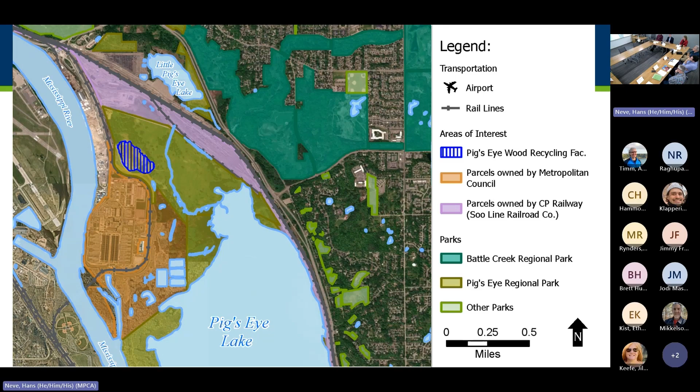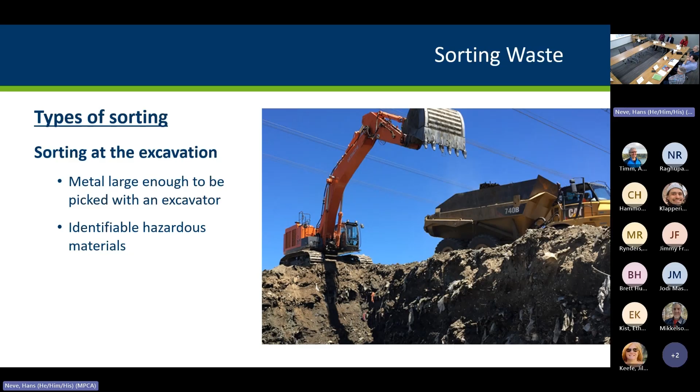This is also waste sorting, this other end of the spectrum. We've got two what we call material recovery facilities. On the right, this is single stream recycling, relatively clean in-feed, higher recovery rate. Research we're getting is like 89% recovery rate.

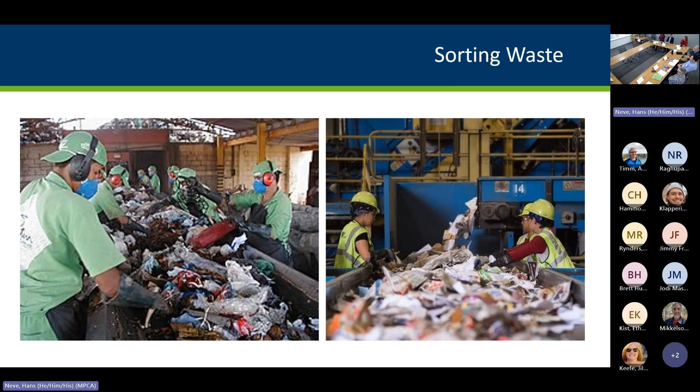On the other side is what's called a dirty materials recovery facility. The whole MSW waste stream is going, and they have certain targets. People are picking out certain targets for the sorting. It's a different kind of sorting, and there are things in the middle.

So we did research into this, where waste sorting is done of landfill material. We weren't finding cases where they were doing it for economic reasons. It really was cases where they have other reasons, other motivations. One of them was reducing the size. That was one. Yeah.

We were hoping to present a whole lot of information today about cost and dollars and tons and case studies. Where we're landing actually is this. Next slide. So we've got really more questions than answers right now with the waste sorting. It gets complicated. These are I think the four big questions, and we may actually need more research and maybe even some pilot studies to figure this out.

What would the percent recovery look like on this? It seems like the dirtier the in-feed, the lower the recovery rate, and it seems to drop off quite dramatically with how contaminated the in-feed is. Could this waste be sorted? Yes. We have the technology, might be a multi-step process, including cost. We could separate out the component pieces.

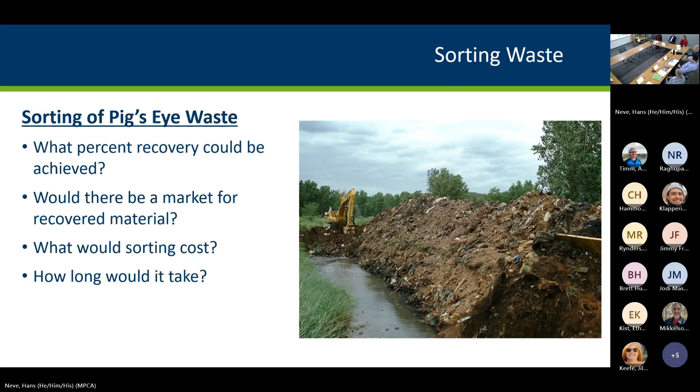Right. Let's keep going. Next on the agenda is a team from Clean Harbors to talk about moving waste.

Some of you have the literature we brought. There's some more, so

Thank you all for giving us a chance to talk to you today. This is quite a large task you've all been given. This is nothing really new for us, so I thought we should come and talk to you about our experience with it and give you our feedback on your project.

Yeah, you bet. Diane Ruddle with Clean Harbors. I've been here for, I think, about 17 years in different roles with Clean Harbors, from operations to now I'm the PFAS leader for the Midwest, West, and Western Canada. I'm here with Joey Maloney, who's our project services representative for the region as well. Project services for Clean Harbors just means big and complicated. So that's why he's here.

So I'll give you a little overview. Some of you may be familiar with Clean Harbors, some of you aren't. Clean Harbors is a fairly large company. We have 100 waste management facilities throughout the country, including incineration units, hazardous waste and non-hazardous waste landfill sites, wastewater treatment. We're also recognized as one of the global most sustainable corporations. So I think that's something to celebrate when you're talking about a hazardous waste company.

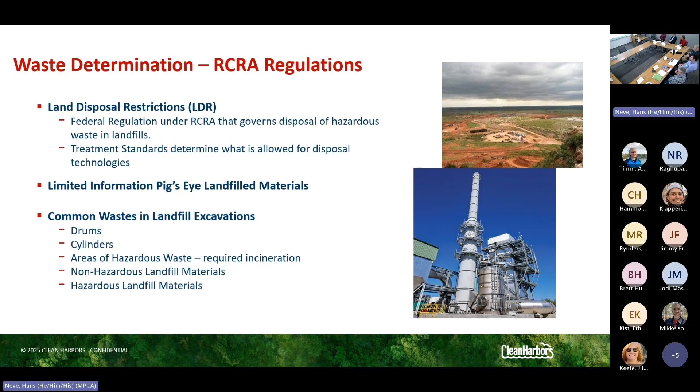You're going to find a lot of buried treasures. You know, you've got drums. You're gonna find some interesting cylinders that nobody knows what they are. You have to figure that out before you decide where they're gonna go. Areas of hazardous waste, I don't think it's too out of the realm to think that you're gonna find some spaces that really should go somewhere permanently and not stay where they are. Non-hazardous materials, there's probably gonna be some areas like that. And then hazardous landfill materials. So the spectrum.

Just talk to you a little bit about our landfill network. We have some of our hazardous waste landfills listed there. Most of them have really good rail service. That's going to be key for this project. Every landfill and every facility in general has different permit requirements as far as what they can take, how fast they can take it. And that's going to be a key part to this project as well, where it's going to go, how fast they can move it.

We do have a large disposal network for all different types of concentrations of waste. So that's going to be also key. And we've got, like I said, a lot of years of experience managing large projects. I think we're on our 45th year of operation today. So kind of impressive for hazardous waste companies.

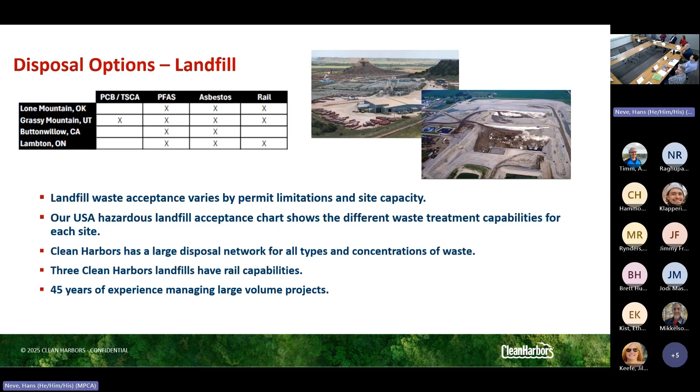Thermal treatment options. We have 66% of the capacity in the country for commercial hazardous waste incineration. They're spread out throughout the country. They're not on every corner. So they're not around the corner everywhere you go. It's a different niche market. Just thought it would be interesting to see the spectrum there.

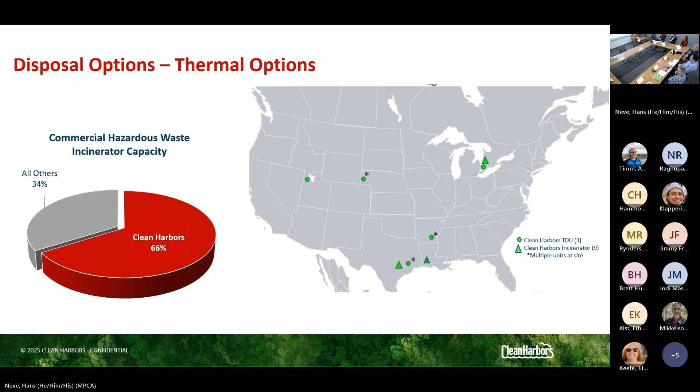We know that there was some talk about barge transportation. Being that it's on the river, that's natural, thinking that that would be a good way to go. We took a look at it. We had some internal discussions, and for this project, we really don't feel like it's going to be your best fit. And there's a couple reasons for that.

When you have to fill up that barge area, it's a big space, and you have to do it fast. So you'd have to have all that material ready to go right when that ship's ready, and then you have to get it there, get it loaded real fast because they charge you a lot if you take any sort of time for it. So you're paying for the slip fee, you're paying for the demurrage for the crew, fuel. They hit you pretty hard.

Now, when you're talking about waste too, that compounds it because you don't want to put the waste directly in that barge. It's not like shipping corn or something like that. You have then contamination that you need to deal with, decontamination, cleaning at the end. Those fees really expound fast. So for quite a few of those reasons, we would say that that's really not going to be your best bet.

In the past, when we've barged waste like this, there's a facility that can barge right out of it, and it's going right to a facility that can barge as well. So when you have two transportation legs to deal with at the beginning and the end, once you get it down the river, you eat up a lot of your savings.

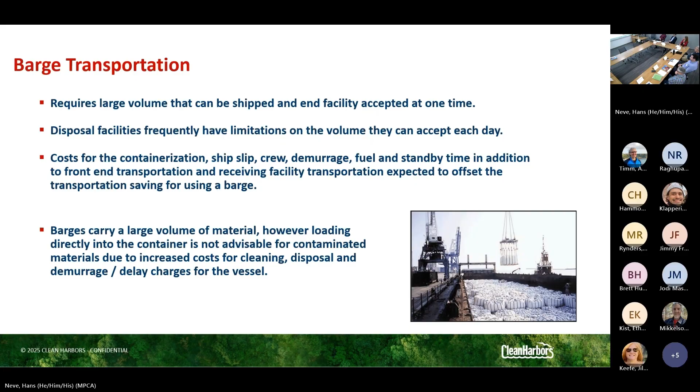And you can see the bags there. That's pretty much the most efficient way to transport waste in a barge because you can control the amount of spillover and contamination of the barge itself. If you're putting clean corn in it, you don't want to say there was hazardous waste in it right before. So that's a little bit about barging.

Railroad is really where we think you're going to find your sweet spot in this scenario. We own a lot of our assets, so the savings of $95 to $125 a ton, that's just a general average for projects. Every location is different. Every distance it has to travel is different. The longer it has to travel, the greater your savings is when you go for rail versus rubber.

Railroads, like you touched on, are not service-oriented companies. You have to really know what you're talking about when you're working with them. You have to basically do all the pieces and then just call them when it's ready. And then they route it through their network to get to the end facility. And you give up a lot of your power when you ship via rail because you can't say definitively it's going to be there on Tuesday, because it goes on their schedule and through their network and then it gets there when it gets there.

So when you have a facility that's expecting your load on Tuesday, they have to be flexible enough that they might get it on Thursday or Friday. And then they have to have the personnel there to deal with that. So it's kind of a coordination piece of it. We are very used to it. We're the largest shipper of hazardous waste by rail in North America. We do over 10,000 rail shipments a year through our network, facility to facility and then straight in as well, depending on which sites we're looking at. And like I said, we do have a very large fleet of our own, which helps us control some of those cost savings.

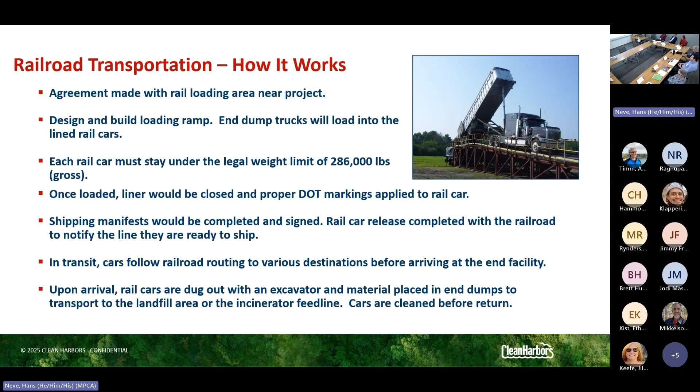In terms of case studies, that tends to be a nice way to kind of frame past projects and current projects. There are a couple abstracts in those binders of the recent projects that we've done. WDE was one that was done in Minnesota fairly recently. So it was an industrial pit that was a closed landfill. We built that structure around the excavation area to control smell and deposition into the atmosphere. And there's a picture, I think, inside the building of the excavation as well.

So we did the install and deconstruction of the temporary building, removal of 397 intact and partially intact drums, overpacking and analyzing, as we talked about. When you pull out those drums, you have to deal with them one by one. And then 3,000 debris drums to our Lone Mountain facility in Oklahoma. We excavated and sampled 13,000 tons of RCRA contaminated soils. So that's hazardous waste soils.

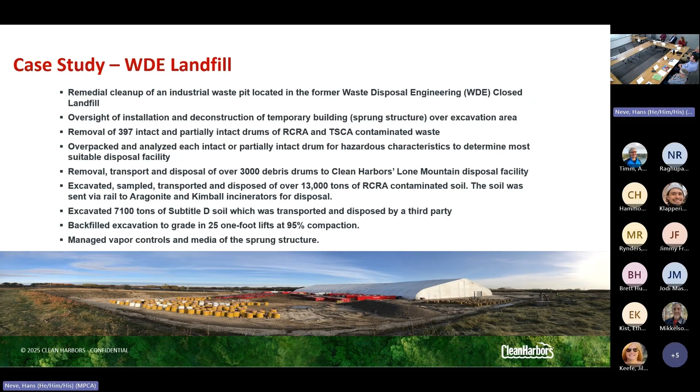And that went to facilities, and those are incinerators in Aragonite, Utah, and Kimball, Nebraska. And then there was also 7,100 tons that were able to go to a Subtitle D landfill. So Subtitle D, that's a non-haz landfill, if you're not speaking RCRA. We did backfill that excavation, and so managed vapor controls and media throughout the structure. So beyond that, when you're shipping loads, you can use a foam product that helps control some of the vapor and odor issues. So that's also another option for odor control, because obviously that's a concern.

So it's just a general slide about Clean Harbors. This is one of our remediation sites in Hawaii. They just gave us a nice little rainbow for that photo, so we wanted to use it here. 12 billion gallons of PFAS water treated. That's just a stat for us. 200,000 tons of PFAS soil removed so far. 95 treatment systems installed and operating, and 85 large remediation projects on the books. So, everybody's definition of large is different. Ours is fairly large.

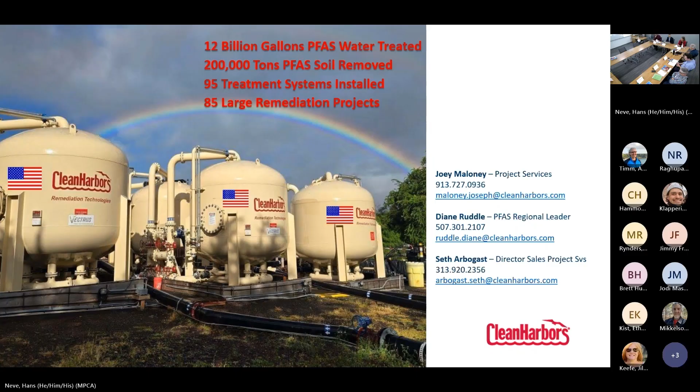So Narayan here with WSP. We've been supporting Hans and MPCA on this project for the last 3 years. So I just wanted to go through some of the cleanup options. I think we've talked through some of these options previously. So we looked at the targeted waste relocation and the filter option, which was pretty much removing part of the waste which separates Battle Creek and Pig's Eye Lake.

So it's just a partial removal, a targeted waste removal, and then putting in some kind of a filtering material to prevent groundwater moving into these water bodies. So you're not truly cleaning up the waste. It's just a filtering mechanism to reduce waste going into these water bodies.

So for this limited treatment, we said it's going to cost $30 million, with the timeline being less than 5 years, because you're just working on a limited area, and with an O&M cost of $6 million. So pretty much it is just keeping up with the landfill, because you truly don't have any kind of long-term treatment here.

The second option was the dig and haul with no backfill. So pretty much, as we've talked about, this is just creating a bigger Pig's Eye Lake where you dig out everything, and all the waste goes off-site.

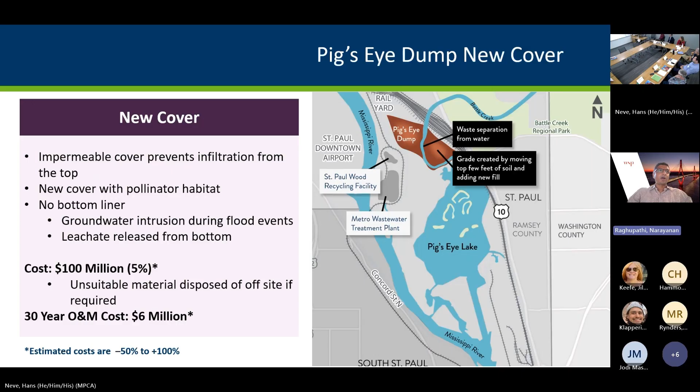And this is pretty consistent on both sides of the landfill. Even on the eastern side of the landfill, where it goes into Pig's Eye Lake, you can see it's pretty much flat. So what the plan would be is we would regrade the site at a 5% grade, so you get this slope. You may have to bring in some clean material if needed, and you would build a 3.5 foot cap. This would drain your water away from the landfill into Battle Creek and into Pig's Eye Lake, so this would truly help with some of the infiltration that is currently happening.

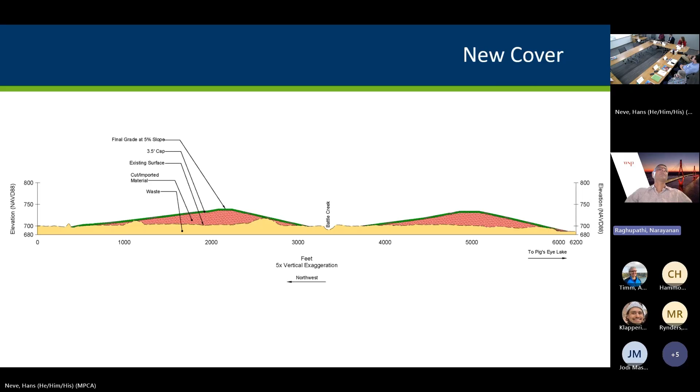I don't know if you can go back to the previous slide, please. Yeah, you can see where you're raising the elevation. If you're almost at 700, you're raising the elevation to almost 740 to get that grade. So it just helps, because right now you pretty much have flat areas across the landfill.

Narayan, can you put into some context the environmental benefit of what's currently potentially coming out of the landfill into the environment or the Mississippi right now by avoiding that permeability into the top layer, given the groundwater coming from underneath?

I think as we complete, because right now I don't know what the concentrations in the soil are. I think that's been one of those mystery questions: what's truly in the waste? What are the concentrations within the waste? How much of it has already leached into the groundwater over time? So if it is concentration which is already in the groundwater, if that is just moving up and down, versus what's the concentration within the waste, and then what is that infiltration rate,

so that is part of the modeling we are looking to complete by the end of the year, to answer some of those questions: the volume of contamination or the mass of contamination within the landfill within the groundwater. So what does that mass balance look like? So I don't have all of those answers as to how much of it is from the groundwater moving up and down versus the true infiltration from superficial infiltration.

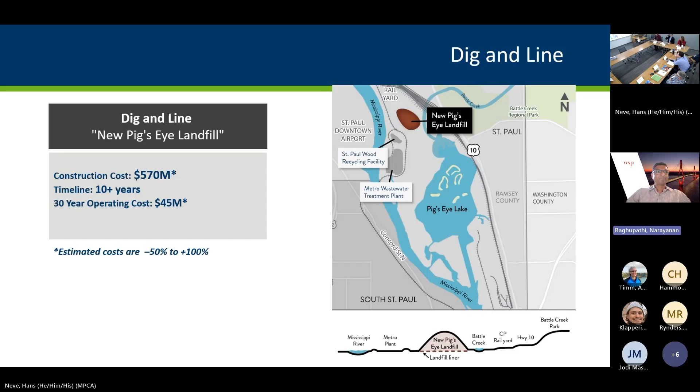So again, just to add more context to the dig and line option. We looked at this where we said you have the Mississippi River to the left, you have the metro plant, and then you build a new landfill, which would meet all the permit requirements. You would design it to have a liner, leachate control, landfill gas control. And then the cost being $570 million over a 10-year period. And this gives you a visual representation of what it looks like with respect to Battle Creek Park. Next slide, please.

So when we developed this $570 million cost, we made some broad assumptions. We are dealing with a landfill volume of 4.5 million cubic yards of waste. Some of that waste is inside the water table. So once we excavate it, how much more clean material do we need to get it above the water table, so that you're still not building a landfill inside the water table? Completing the current design investigation, what does the topography look like? What is the environmental investigation that needs to be completed with respect to characterizing the waste?

How much waste? Because we still need to determine, because the waste depth changes within the landfill. So we just completed some of that investigation over the last month. In some cases, you have waste at 6 feet, some cases all the way down to 25 feet. So we are seeing a big variation in the depth of the waste. So we want to complete that part of the investigation with understanding the waste, the mass in the waste, and how we want to characterize that.

And then the last piece is the geotech investigation. The geotech investigation is important because you want to determine your slope stability, how much settlement you are going to have, because once you consolidate all that waste within the landfill, what is the weight of that landfill going to be? Are you going to create any settlement issues? What is the slope going to look like? So we need to complete the geotech investigation.

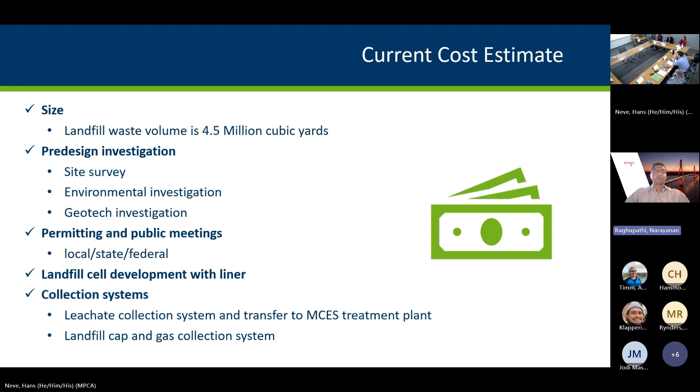And then from a landfill construction perspective, what does that cell development look like? Building a landfill with a liner. What are the collection systems from a leachate collection system? Right now we have not included costs for treating the leachate. The anticipation is we can transfer it to the MCES treatment plant, and then the landfill cap and gas collection system. Because the leachate treatment is also going to be a big part once we understand what that looks like. We would have to model some of that to understand what that leachate concentration might be, because we know the groundwater concentrations, but not from a future leachate collection system. Next slide, please.

So what are the benefits? So two things we're going to look at as benefits and challenges. So from a benefit perspective, I think one great thing it does is it keeps the waste on site. You're not moving waste from Pig's Eye to another landfill, you're pretty much just moving it from one side to another side.

But what it would do is, right now it's an unpermitted landfill. So it would be a properly designed landfill, as we've talked about, you're managing leachate, you're managing emissions. So it would be a properly designed landfill, which would meet all your requirements of a landfill. You prevent any more leaching of contaminants into the groundwater.

So we've talked about you having leaching happening from the top, and then some of the leaching happening from the bottom. So you would prevent both of those in this scenario with the new landfill, because you would have a liner at the bottom of the landfill, which prevents any more infiltration from the bottom as well. And then you have the landfill gas emissions.

And then what it does is it gives you more space from a reuse perspective. Do you want to convert it into a park or whatever that might be, or hiking, whatever you want to do? So it gives you more options from a landfill reuse perspective.

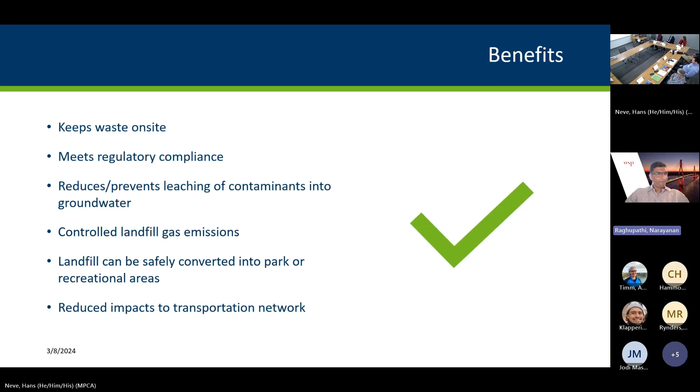And then the last one is just reduced impacts to the transportation network in that local surrounding region. If you have hundreds of trucks moving in and out daily, from a transportation perspective, does it benefit the area? So those are some of the broader benefits. And then we can look at some of the challenges on the next slide, please.

So again, from a construction perspective, the worker health and safety. Whenever you're excavating waste that you don't know what it is, we've talked about asbestos and maybe other hazardous material that you might encounter. So worker safety is always paramount. So you'd have to have a stringent plan as to how the workers work safely. So that is a big part.

I think we've talked about flooding. So how do you manage drainage and the surface water control? Do you build swales? Do you build ditches to move water away? Because what you would do is build one cell at a time. You're not going to have 200 acres all open at the same time. So you're going to rebuild the landfill in segments.

And so what you could do is build swales, smaller retention ponds or ditches where you can move the water away from your active excavation area. But again, there might be certain times, just because of how prone that area is to flooding, where we might not be able to do anything. There might be times where we just have to wait for a month or two for it to be suitable for excavation or construction again.

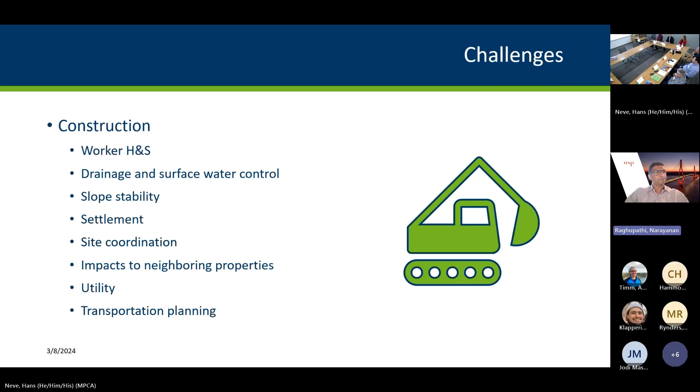And then just the utility: you'd have to run new utilities to the landfill. And then the whole transportation planning, because you're still going to have a lot of equipment on site from rebuilding the landfill. So how do you manage the transportation part of it? Next slide, please. That's pretty much it.

Any questions? You mentioned a bigger discussion on affecting neighboring properties like the Metro plant. When or how would we have that discussion?

I think for me it's how does that, just from the topo change, does that impact operations? And again, that's a broader discussion. Because, for example, the Metro plant, from what I understand, you guys have your own dewatering system. So if I have pumps running from a leachate collection system, does that impact any of your dewatering systems?

And again, from a CP Rail perspective, once that landfill is built, if I say, for example, have a 100-foot high landfill, how does that impact any of their operations? Because we'll have to build swales and drainage systems across the landfill. Does that impact from a broader perspective what happens to CP Rail? And again, I think we've talked about the FAA too, because they have concerns about the landfill height and what that might be from the flight path perspective as well.

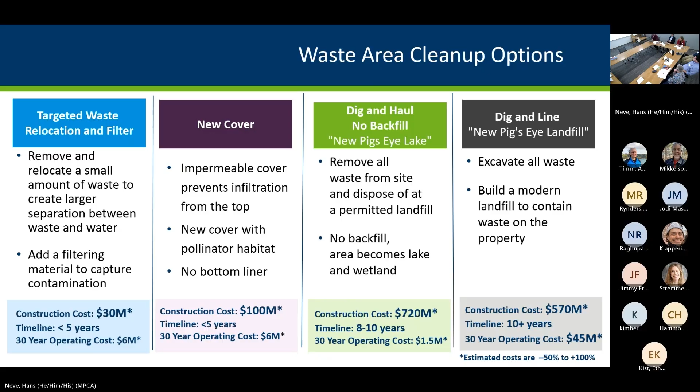This is last call. Anything more for today? Yeah. Did you say dig and haul? Dig and haul and backfill. Oh. It's off the table. Backfill was off the table. You have something? Could I?

Go ahead. On the dig and line, where you excavate all the material, and I presume the line that you've got to get it up out of the floodplain. So you're elevating and filling in this area, and the amount of fill that could be put in this area has already been maxed out by regulation. You can't put any more fill in this area. So it seems like you couldn't do that project anyway.

I think you're talking about a very real engineering concern with floodplain, additional material. All this has got to get looked at and would have to be permitted. It is a real concern. Well, I'm just saying it's the level because of what's been done already. It's maxed out, you can't be doing any more. But it seems that rules that out. Yeah, this is the beginning of a figuring out process. That's a real thing on the table that needs to get answered with a detailed engineering evaluation. Yes.

When people talk about putting a landfill mountain in there, last time we were told it would have to have a flood wall around it, would have height requirements. When you're talking about hiking up the mountain, you have to somehow get over the flood walls too, like the one that was put around the airport. So any pictures or models should have that. Part of the model. Right.